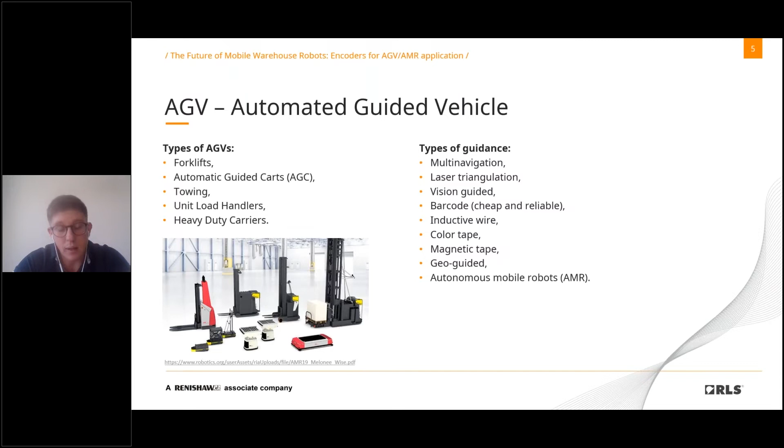So basically the difference between AGVs and mobile robots is that mobile robots use many more sensors and can drive autonomously. You can see on the right side that besides encoders, there are also many other sensors, cameras. The previous presentation already explained a lot about the other technologies used in mobile robots.

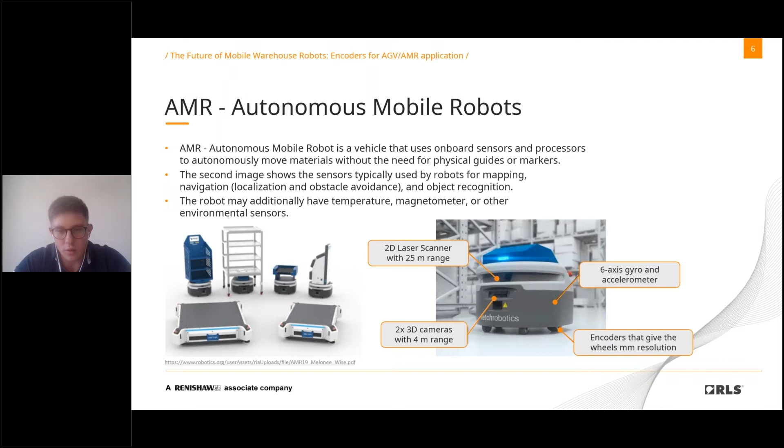And if we look from the vehicle's perspective, how does it look? On the left hand side, we see AGVs. They follow a track, they know where to go, and if they face an obstacle, it's not possible for them to avoid it. That's the biggest advantage of the mobile robots. On the right hand side, with a camera, for example, they see the space in front of them, and if they have to avoid an obstacle, they do some calculations in the processor and take the best path to get to their final spot.

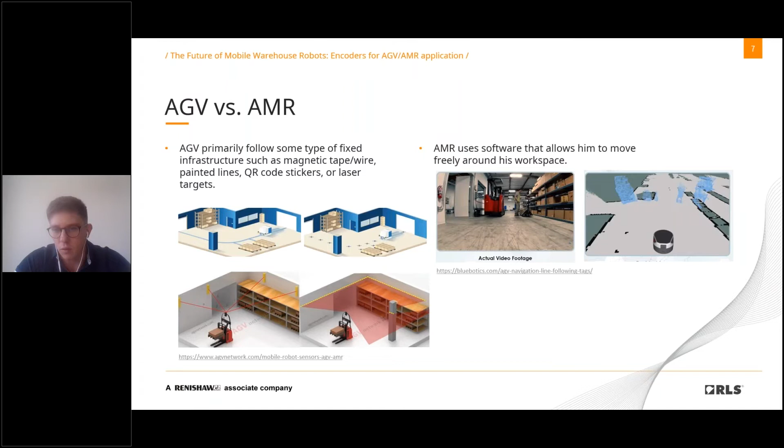In these AGVs or mobile robots, we see different driving units and steering units. Basically, there are three main steering controls. One can be called steer drive, with only one motor used at the front. Then we have a differential drive, with two driving systems on the middle wheels, and the last one we can call quad drive, with a front and back steering system on the AGV.

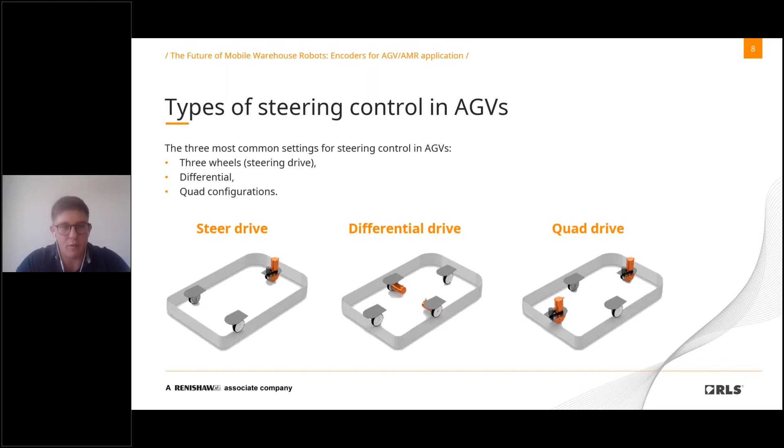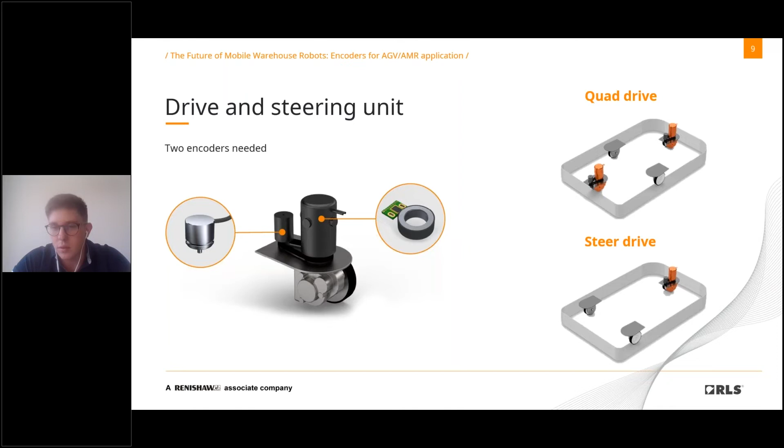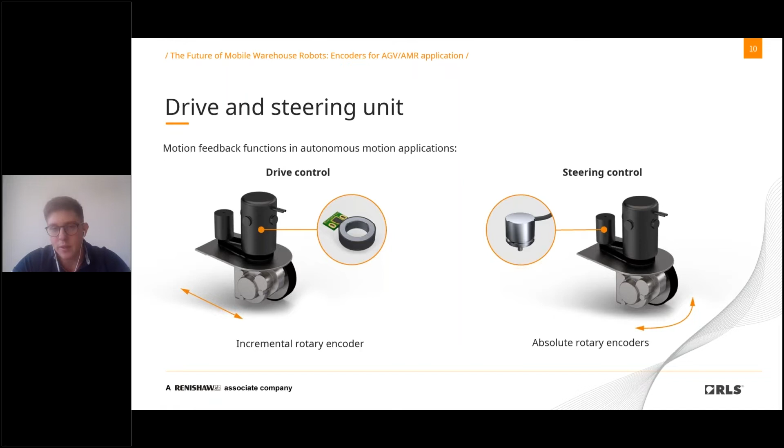If we look at the quad drive and steer drive, normally two encoders are used. One of them controls the driving, moving forward and backwards, and for that incremental encoders are normally used, calculating the velocity. The second part, the steering control, is controlled by an absolute encoder. Why absolute? Because we always need to know exactly where we are positioned, how much the wheels are turned. I will talk about the encoders and their characteristics a bit later.

And if you look at the differential drive, we see a control steering unit as on the left hand side. Normally one encoder is used. In most of the applications where we are present, an analog output solution is chosen by the customer. You might ask why analog.

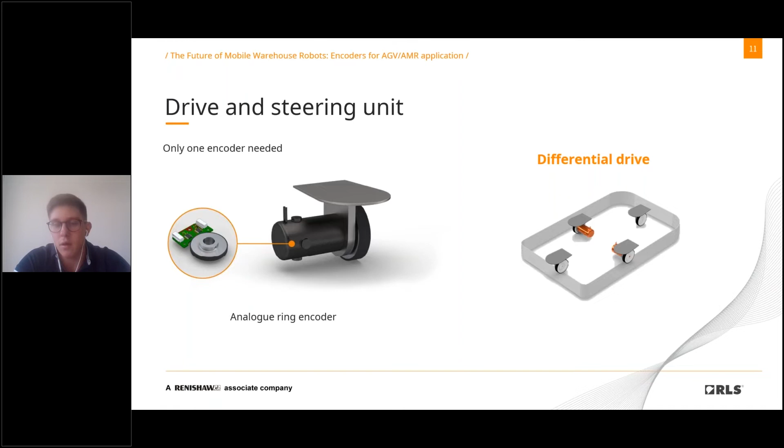The reason is just easier certification, in case the encoder doesn't have a specific certificate itself. In this case, the wheels are turning front and back depending where they want to go, and that's why they don't need an absolute encoder here, because by turning one wheel front and the second one back, you can choose the direction you want to go. So those are the three mostly used driving systems, and two driving and steering units which we see on the market the most.

But generally the technology itself is the same. Any of the sensors mentioned detects the magnetic field and brings the analog signal to the interpolator - I'm making it simple now. Before the signal gets into the interpolator, it's amplified to have ideal phases and amplitudes of the analog signals. Afterward, the interpolator gives the output signal as required. The output signal can be just analog, so there's no interpolation done in that case - it can be incremental, analog, or absolute.

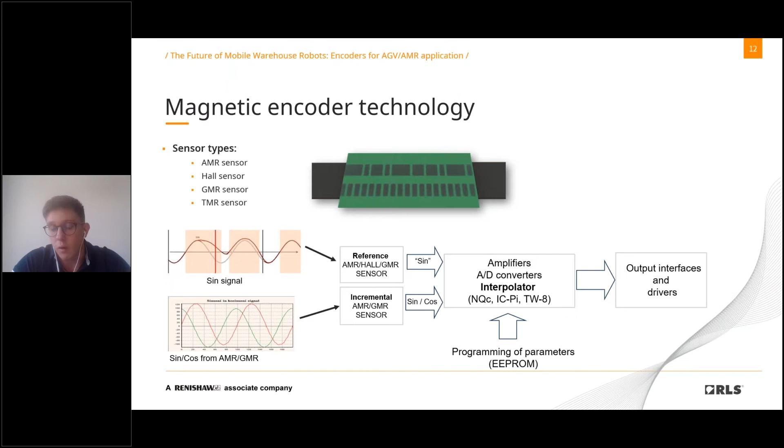And how we see the encoders used in AGVs or mobile robots - more or less 12 bits of resolution is enough for this specific application, and the accuracy of plus minus 0.3 degrees is also good enough for now. The customers choose what kind of output they want to use. We can relate that to the previous slides where I explained which steering and driving units are on the market currently, so based on that, they choose incremental, analog, or absolute signal.

By absolute signal, we see three main protocols used - these are SSI, BiSS C, and CANopen. The encoders at the end of the day can be certified with safety standards or not. Our company at the moment doesn't hold such certifications, but we don't see that as an obstacle. The customers can still take our encoder and certify the system as the whole system together. So yes, encoders can have or not need to have their certification - it depends on what the customers prefer.

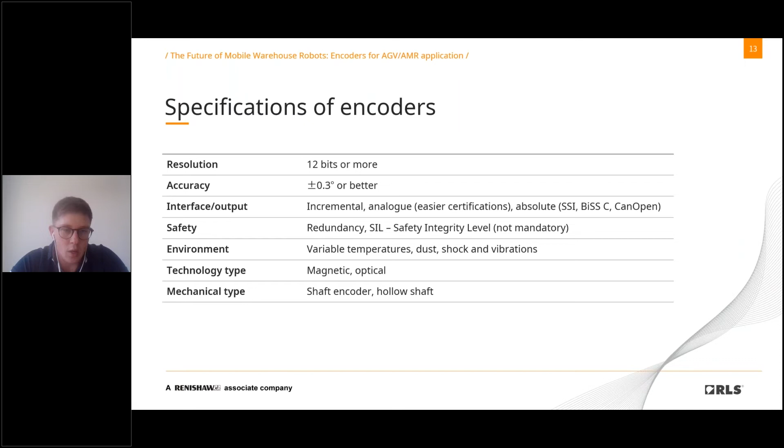So those were basically the main characteristics of the encoder, the most important ones when talking about encoders used in mobile robots. Now let's have a few words about the future of encoders, how we see it. We definitely see that the industry would like to take part in the so-called Industry 4.0. By Industry 4.0, we think about additional sensors already on the encoder itself - sensors for vibration, temperature, and others - and such an encoder can then predict how long it will work and when maintenance will be required, or even replacement. I can definitely say such encoders will be more and more present in the future.

Another thing we believe has good potential are so-called plug-and-play solutions. We know that we live in times where almost every second is important, and production would like to be optimized as much as possible.

The manufacturer of the encoders would not like to invest too much time implementing the solution, so it's important that the cooperation between the controller manufacturer and the encoder manufacturer is good, so we can offer the end customer a plug-and-play solution.

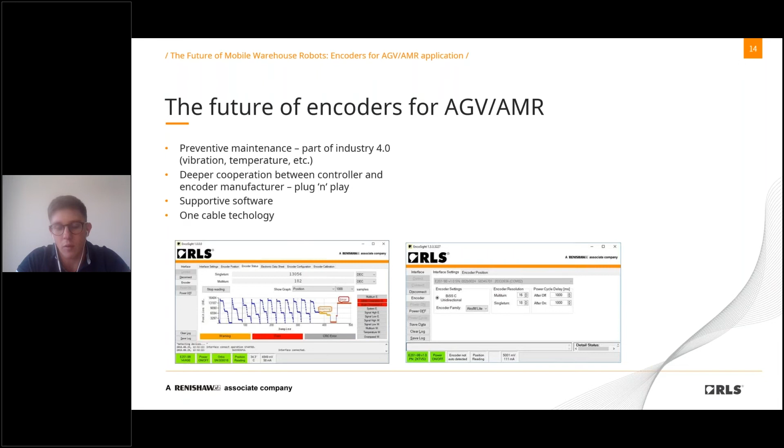So that was basically it from my side. I wanted to give you the fundamentals of encoder technology and the usage of magnetic encoders in mobile robots and guided vehicles, without going too much into details, but of course I'm happy to answer any additional questions.